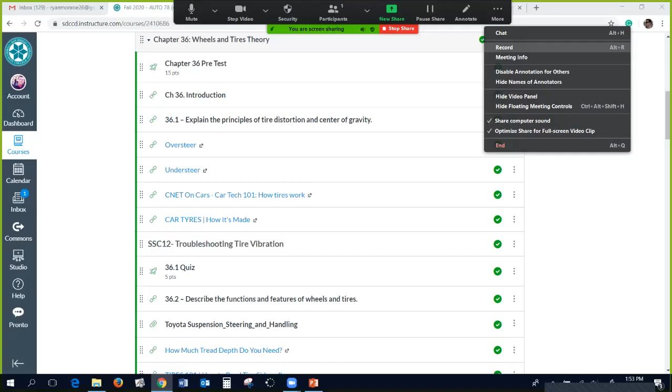I apologize that things are a little bit slow moving, but I guess that's how things are going to be for the foreseeable future. But we're going to get moving here, and I'm going to have you guys start going through the information in Canvas using CDX.

Okay, so here is chapter 36, Wheels and Tire Theory. We are going to have you start going through this chapter, and I am going to assign some due dates to the quizzes and the chapter exam. I didn't realize this was already published, and so I've had a couple students already go through it. So those of you that have already gone through some of this stuff, I would really appreciate it if you take a good listen to what I'm saying here.

I'm going to present some different information, different from what you are seeing through CDX. I'm actually going to use some Toyota information because I really like their presentation. And also, please take a good look at these YouTube videos that I have here. These are really fun to watch. This one's about oversteer, understeer. This one's talking about how the tires are made. And same thing here. This one's a little bit longer. I'll only show this one for a few minutes.

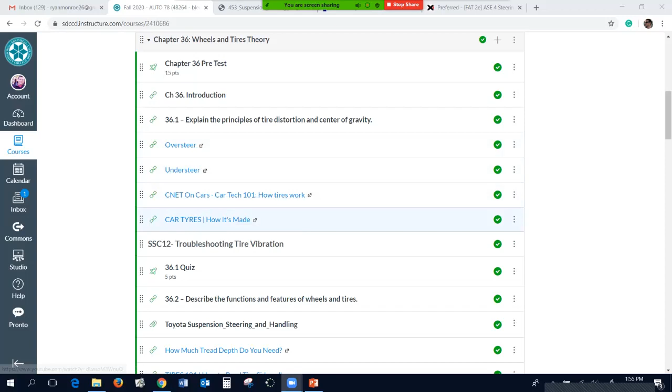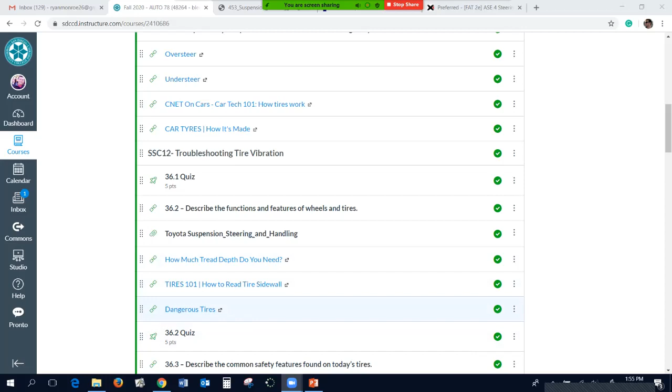These are very interesting here. How much tread depth do you really need? This one is kind of scary when you watch it. It has testing of vehicles with different tread depths and how that affects braking on wet surfaces. This one's how to read a tire sidewall. And this one's dangerous tires. I mean, this is pretty scary, some of the tires, what they will do to people.

I'm also missing my other favorite one; it's going to be in the servicing wheels and tires chapter, because they are dangerous for those of us that are going to be handling them. This chapter right here is more about how tires are put together, what their function is, the tire construction, the design differences, tire sidewall data, and fundamentals.

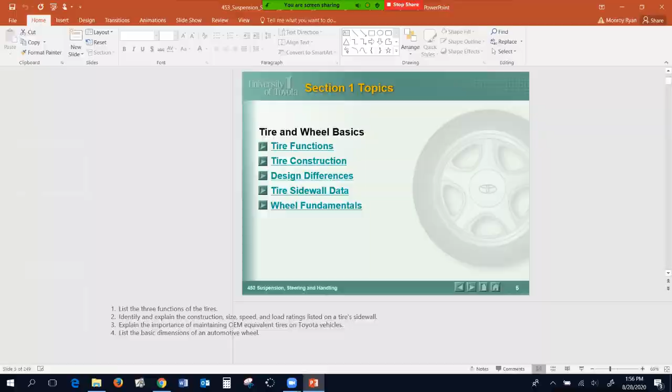So without further ado, I am going to get into this presentation, hoping that I can make it where it doesn't show the slides. I want just the pure slideshow. All right. There we go. All right. So

Again, we are going to talk about the functions of the tires. We're going to identify and explain the construction, size, speed, and load ratings that are listed on the side of the tires. We're going to explain the importance of maintaining OEM equivalent tires on the vehicle.

I know a lot of people want to put aftermarket rims and tires on it, but we have to understand that that can present all kinds of other problems, and a competent shop can overcome those problems. Just throwing a set of tires and wheels on a car, you really need to know what you're doing. And you can open up a whole can of worms with liability if you're putting the wrong tires and wheels on a vehicle. And last, we're going to be taking a look at the basic dimensions of wheels.

Okay, so the tires, they're going to serve some very important functions. They're going to support the vehicle's weight, absorb minor road shocks, transmit braking, acceleration, and cornering forces. And so the forces of cornering, road shock, braking, and acceleration are transmitted from the road surface to the vehicle through the 4 contact patches where the tires meet the road.

Both safety and satisfaction are compromised if these forces exceed the customer's comfort level or the tire's traction capabilities. A comprehensive understanding of tire and wheel basics is necessary in order to diagnose vehicle handling concerns and tire wear patterns. The manufacturers of these vehicles, when the vehicle is brand new, spend a lot of time choosing the tire and wheel package that they are going to put on the car.

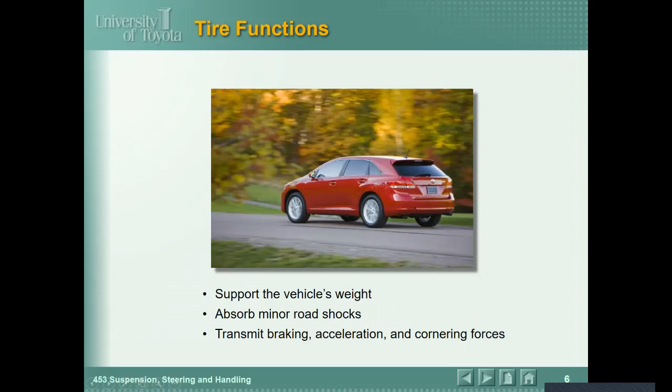Again, this is the only contact that the vehicle has with the road. And that contact patch at these 4 tires is very, very important. And by just changing the tire, the type of tire, the brand of tire, the compound that the tires are made out of, all of that stuff, even the tire pressure can greatly affect how the vehicle goes down the road.

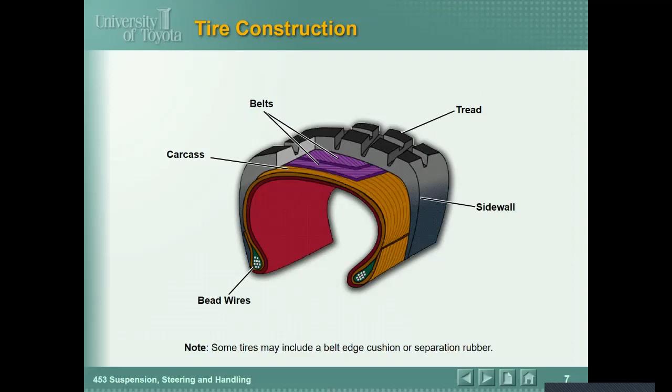All right, so let's take a look at how modern tires are put together. So we've got the carcass or body plies, bead wires, belts, and within the steel belted radial tire, there may be different combinations of polyester, nylon, rayon, and other material along with steel belts. And then that's going to make up the sidewall, and then on top of all that is going to be the tire tread.

So radial ply tires have ply cords that cross the tire perpendicularly from bead to bead. And so this design is going to reduce tread squirm because the sidewall flexes as it meets the road surface. And that's going to reduce tread deformation, and also reduces a radial tire's rolling resistance.

So back in the late 60s, early 70s, we made the transition from bias ply to radial ply, and not only did the cars handle better, the cars would go straighter when you hit the brakes, but we were also able to get improvements in fuel economy up to 20% over bias ply design.

Also, rigidity and strength are added to radial tires by wrapping belts around the tire's circumference between the tire tread and the ply cords. However, this added support does slightly reduce low speed ride quality compared to bias ply design. So when we went to the radial ply tire, they became stiffer. And the stiffer the tire, the more you're compromising ride quality.

And if you look at how cars are designed today, the size of the sidewall went from being like a 60 or 70 series tire, which is a very tall, thick sidewall, and now we're down to like 50, 40, 30, and those tires are really, really stiff, and it's going to affect how the tire rolls down the road.

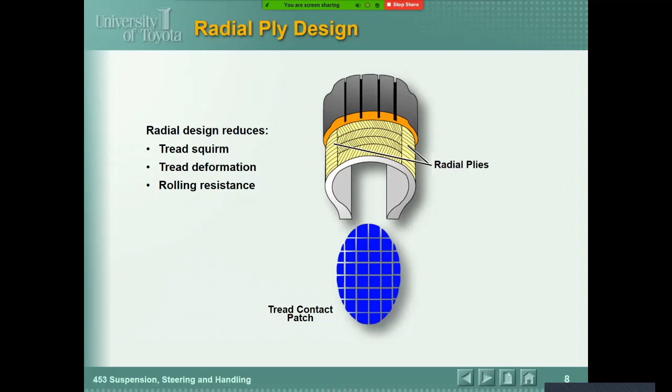All right, so let's take a look at run flat tires. These tires can be driven with no air pressure for about 100 miles at 55 miles an hour, and it's made possible through durable inserts in the sidewall. So the sidewall is very, very thick. This makes a heavy tire, which is not good for unsprung weight, but it definitely makes it so you don't have to have a spare tire in the car.

Due to certain characteristics of run flat tires, it might be difficult to visually detect when a tire actually has low air pressure, and so cars that were originally equipped with run flat tires had to have a TPMS, or tire pressure monitoring system, to notify the driver that there is low pressure in that tire.

Okay, so when we do tire repairs, we've got to make sure that we are adhering to standards, especially when working with tires.

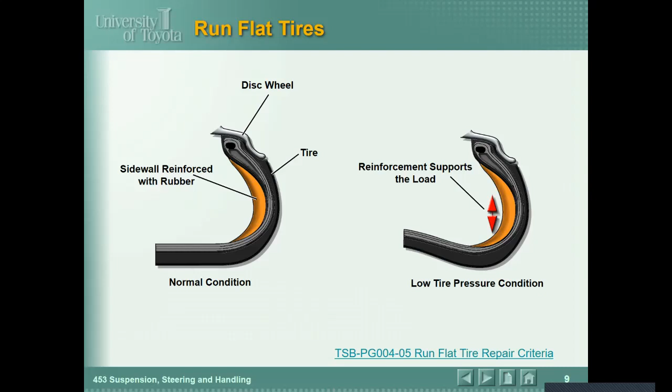All right, so here is all the information that is located on the side of the tire. I'm not going to go through all of this. I would like you to watch the tire sidewall data video that I have in the module. It's going to go through all of this. There are 3 different types of tires that the gentleman will be talking about. And what I mean by that is radial tires like this that are metric size, standard size tires, and then high flotation size tires. It's going to go through all of that.

Okay, and then the different types of tires that we might have on the vehicle could be summer, all-season tires, and then snow tires that we would only want to use in snowy conditions because they will have studs put into the tire tread.

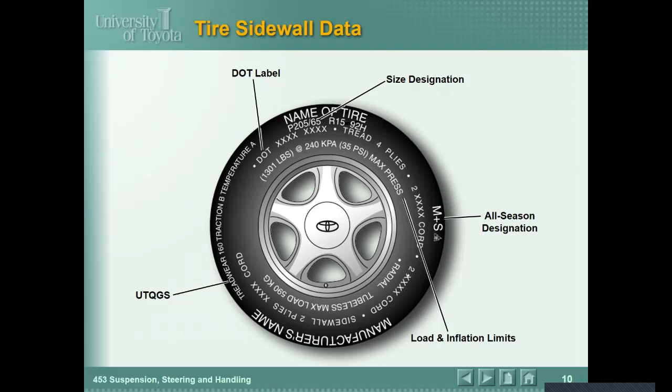That way you don't have to put chains on the car. All right, so take a look. We have P for passenger car, 205 is the cross section width in millimeters, 65 is aspect ratio. So that means that the height of the sidewall is 65% of 205 millimeters. Let's just use easy math. If we had a 100 millimeter wide tire and we have a 50 series tire, that would mean the sidewall height from the rim to the tread would be 50 millimeters, 50% of 100.

Okay, so R stands for radial construction. 15 is the rim diameter in inches. The load index there is 92, and this tire has a speed rating of H. They come in all kinds of different load indexes and speed ratings. Whatever the car had on it, you could put a speed rating that is the same or higher. You cannot go lower in speed rating.

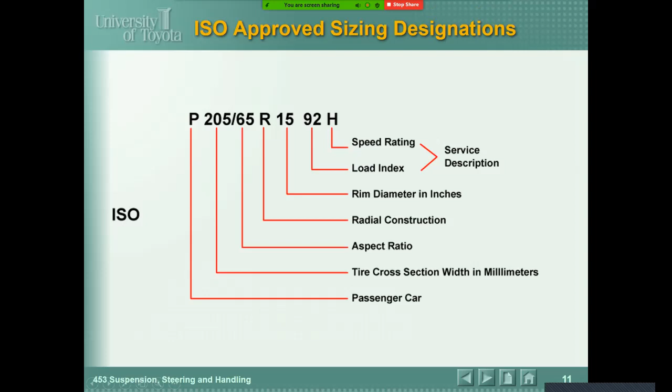Okay, so the aspect ratio, also known as the profile of the tire, again, is just a percentage of the sectional width. So you can see here that a 70 series tire is going to have a very tall section width of the sidewall. So you can see that this is going to be old school tires. Okay, now the new school, and even this is beginning, 50 series tires are kind of old school now. If you go look at newer cars, they're going to have 40s on them, 35s from the factory. The tire sidewall has continually gotten shorter over time.

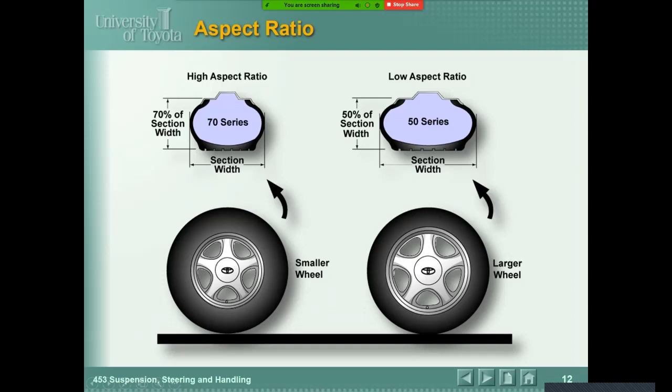Okay, so here's the service description. Again, the load index, the load capacity, and the speed rating. There are charts that you can look up. You don't need to memorize this. You just need to understand, again, that if the car requires a tire that can handle 1,389 pounds of weight on it, you cannot go lower than this. If something was to happen to that car and you put a tire on that, there would be a lawsuit. Okay, you can kill people.

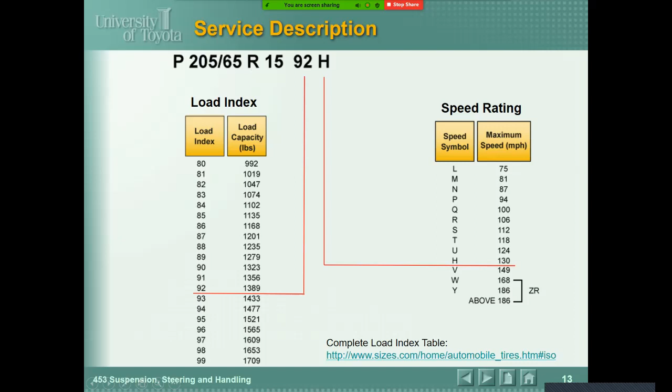So there's no problem with going as much or greater than. That's fine. Same thing with the speed rating. If it had an H tire that's rated to 130 miles an hour, you can put an H tire, or you can put ones that can sustain higher maximum speeds, but you cannot go less than what the vehicle was originally equipped with. All right, so here we go.

Load and inflation limits. So pressurized air inside the tire supports the vehicle's load. The required inflation pressure increases when the load applied to the tire increases. So heavy loads amplify tire flex. This causes the internal tire temperature to rise. The extra heat weakens the bond between the individual tire components and causes tread separation and/or failure. Maximum load and the corresponding inflation pressure to support that load are specified on both passenger car and light truck tires.

So I just want you to understand that there is a maximum load and maximum tire pressure on the side of the tire. Also, there is a tire inflation placard or sticker that is in the driver's door jamb. And it will tell you what the maximum tire pressure is for the tire that is supposed to be installed on the vehicle. Now, if you are going to overload the car, what this was just saying is that you would have to put more pressure in the tire.

Now, the engineers who chose the tire and wheel package also chose what tire pressure the stock tire should be inflated to, and that pressure is good to handle the gross vehicle weight even when it's fully loaded. So you should not be messing with the tire pressure. You should be setting the tire pressure to what is indicated in the driver's door jamb on the tire inflation placard.

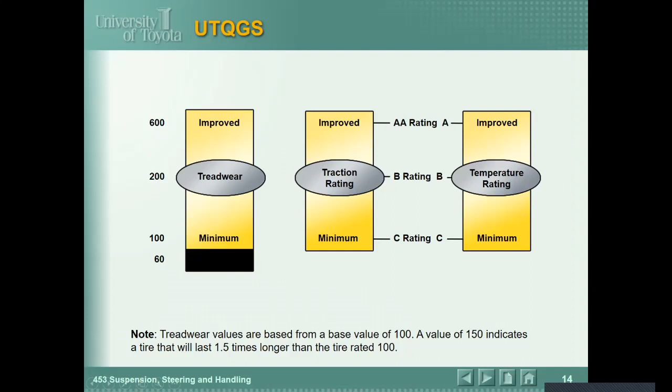All right, so let's see here. On the side of the tire, it's going to have this DOT number. It will show you the tire manufacturer and what plant it came from, the tire size, so this is their serial number, manufacturer's code, but to us, the most important information is actually these last 4 digits of the tire serial number. And this will tell us the production date. So for example, this tire was produced in the 37th week of the year 2001.

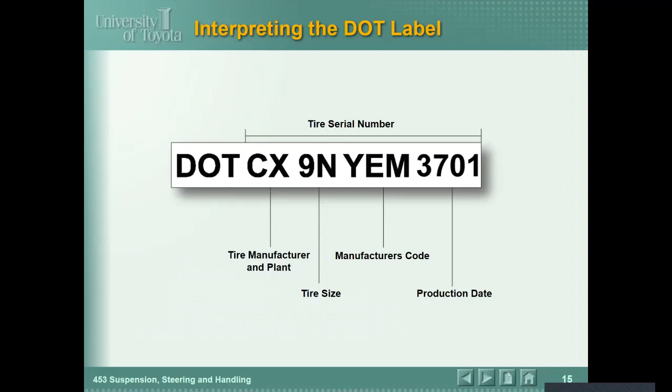So we really should be taking a look at these tires. Once they hit about 10 years old, they are done. They should not be on the car. All right, so now we're moving on to the wheel, all its different parts, and its dimensions.

So the wheels transfer the forces of acceleration, braking, and cornering between the tire and the suspension of the vehicle. And wheels typically consist of 2 primary pieces that are constructed of either stamped steel or a light alloy. The center section or disc contains 2 items: the spindle center hole, or the pilot, and the wheel stud bosses, the mounting holes. The wheel can be centered on the hub by either the spindle center hole or the wheel lug nuts. So that's either going to be hub centric or it's going to be lug centric.

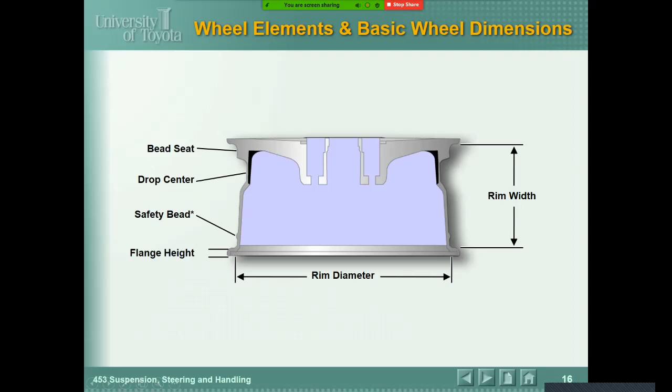All right, we're almost done. Okay, so the diameter of the circle formed by the rim's mounting holes is called the bolt circle, and they're commonly going to be like 4.5, 5.5, 5.9. We can also have them in metric, 100 millimeters, 120 millimeters, and so on.

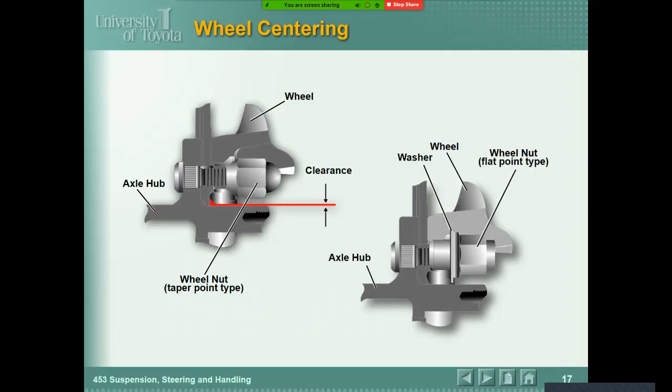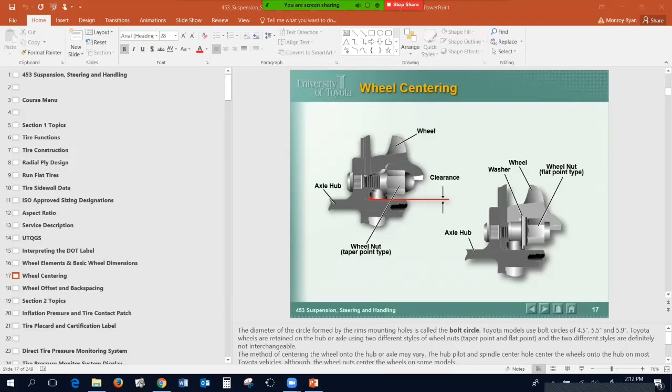And we also can have the wheel retained to the flange in a couple different ways using different nuts and bolts. And so I'm going to switch over to the whiteboard just to show you what I mean by that. So we have a couple different lug nuts that are available. So let me get over to my whiteboard, and I want to draw a couple different lug nut styles that we have.

So all lug nuts have a taper, and this taper forms an interference fit with the rim. So if that's the rim, the stud or lug stud is going to pass through the lug nut like that. So it's very important to understand that this taper goes into the wheel. With this type of lug nut that I've drawn here, sometimes rookie students will try and put the flat part of this on the vehicle. And if you do that, you'll destroy the rim. Okay, so remember the taper has to go into the rim.

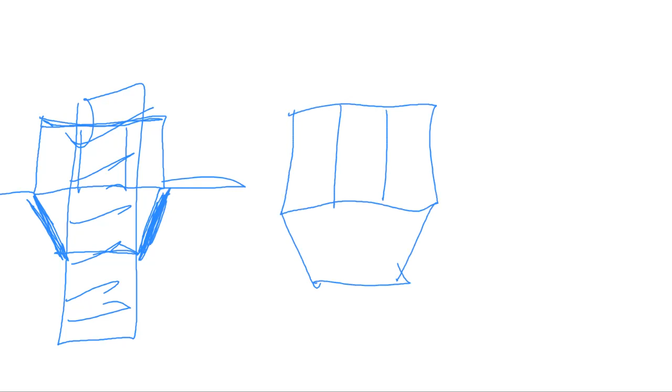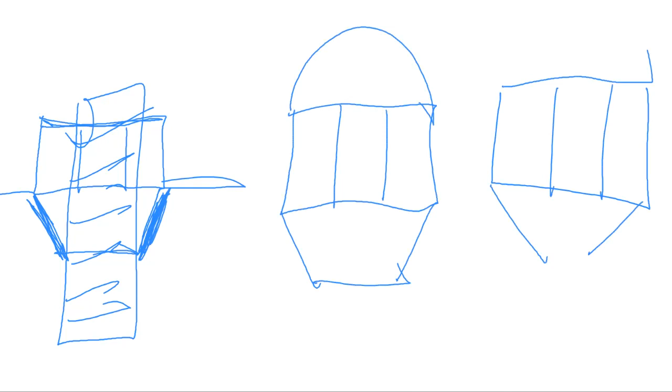So there are other lug nut designs where that is impossible to do. You can only put it on one way because they have a cap on it. And that would be an acorn style lug nut. Then there are the Germans and the Europeans. They don't use nuts, they use a bolt. So same thing, you have no choice. You can only put this in one way. It comes to a taper like this, but then it's a bolt.

So BMW, Mercedes, all the Volkswagens, all of the Volvos, they're a real pain in the butt. These guys make it very difficult to put the wheel back on the car. And in fact, they make tools where you thread a stud into the flange and it makes putting the wheel back on the car a lot easier. Anyways, let's get back to this so we can finish this up. Get rid of my whiteboard.

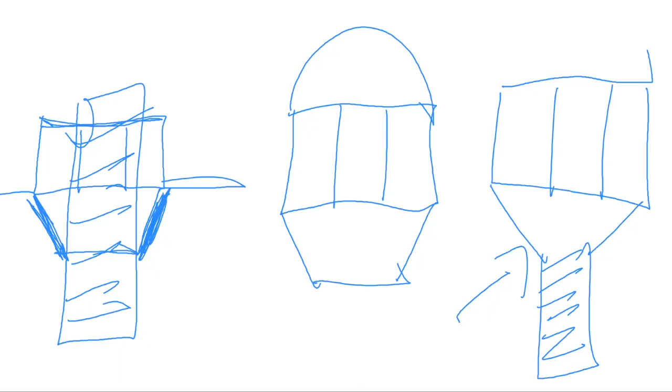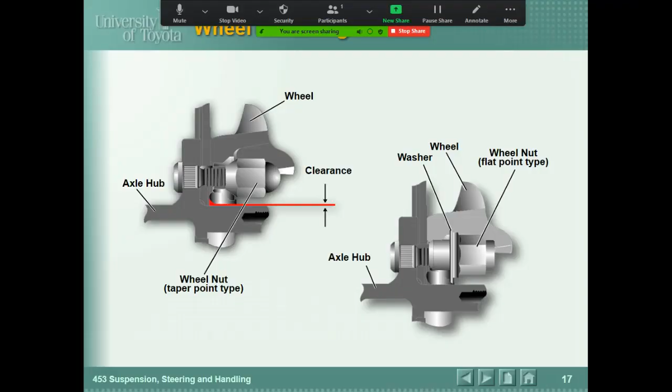Whereas front wheel drive typically have more of a positive offset. And that just has to do with the difference in front wheel drive versus rear wheel drive and how that affects the suspension. Anyways, that is enough for this as far as we need to go when it comes to the PowerPoint.

Again, what I would like you guys to do is to look through all of this stuff right here. I'm going to work to create the videos that are needed for this troubleshooting tire vibration. We're going to take a look at this TPMS because that is covered in this chapter. So what I would like you guys to do is to work through 36.3. I'm going to set the due dates. So this is going to be due by Monday, chapter 36 through point 3. The quiz needs to get done. I apologize, 36.2, and then we'll take a look at all of these.

I'll create these. Unfortunately, these are Honda videos, and you do not have access to them. I would typically share them in a classroom. I'll make a video of them and I'll share them with you in that way.